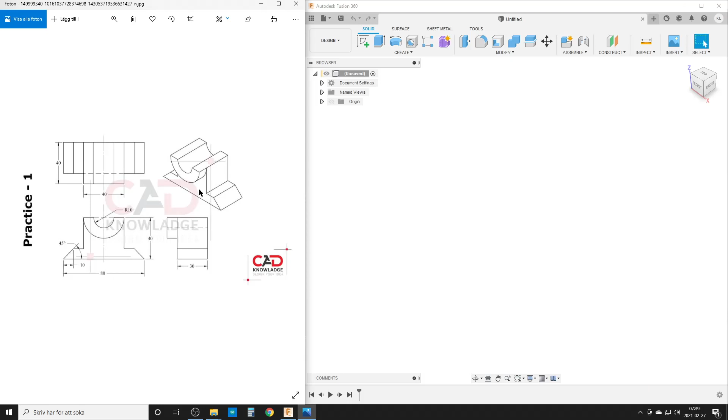But first of all, let's have a look at the drawing. This is a little small exercise, practice number 1, so this should be really easy. Yes, it is easy. Let's zoom in a bit. If we have a look at this, we have some type of dimension here, we have a dimension here. These two are basically extrusion dimensions, so we should be seeing all the dimensions we need here. Yeah, the 40 dimension up here is the same as this here. So from this view, we see everything of the part. So this is what I will sketch.

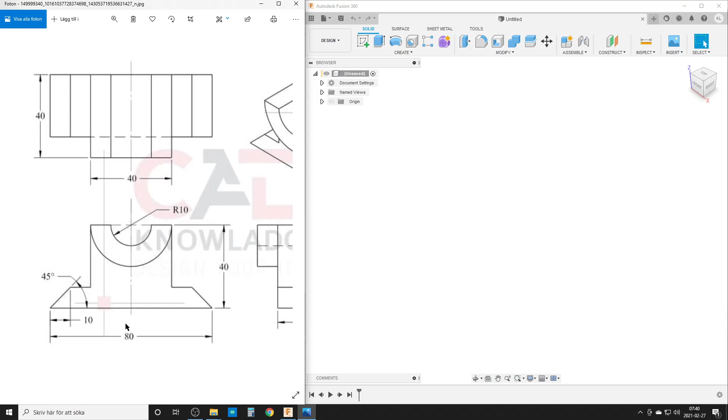I will first show you how I sketched this in the early beginning, where I sketch everything that's in the drawing. And then I'd like to show you a bit of an extreme version of the other way, where I sketch the bare minimum dimensions and then use features to create the part. These are like two ways to create things in Fusion, and sometimes there's a golden midway in the middle. That's the best way to do things. So I just want to share this and hope you enjoy it.

Let's start, create a new component. Part 1. I don't want to call it anything stupid. Part 1. Style. I can't spell. Style. New. Like you're a new beginner, you will most probably sketch everything you see. I did that. That's nothing strange. We're going to create a sketch. I'm going to select the front plane here to work on.

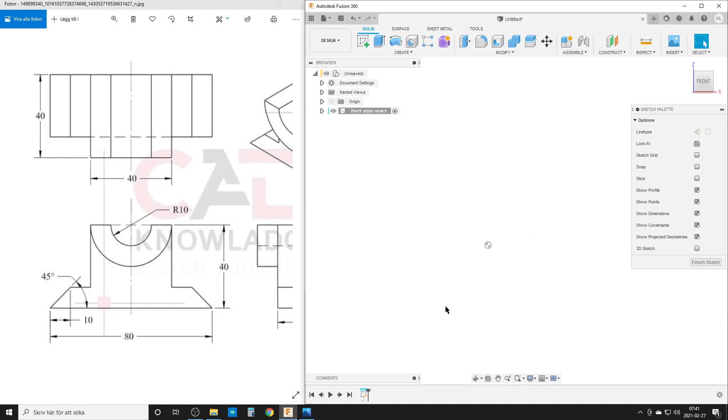The first thing, we have a line here, so let's start a line. I'll make it horizontal, it's going to be 80. We're going to use constraints. Yes, I have shrunk my window here, so I have to hit the constraints down here. I'm using midpoint, this line, and this point, so I get it locked down. Let's open up here and see. By locking it down like that, I get a fully constrained sketch. And now we can start sketching the other stuff here.

We have a line here. It goes like this. It gives me the parallel constraint. I say thank you, and then I go up. I finish that, and then I do the same thing over here. I try to use the help lines to get me somewhere correctly, like that. And we can start dimensioning. I'm gonna hit dimension up here. You can hit D on the keyboard if you want to.

The dimension from here to here is 10. And the dimension between these two should be 45 degrees. We can also put it down here, 45. Let's do a dimension first. This here is supposed to be 40. And the dimension between these two is supposed to be 40. Let's see if things fly away. It didn't fly away. Thank you, Fusion.

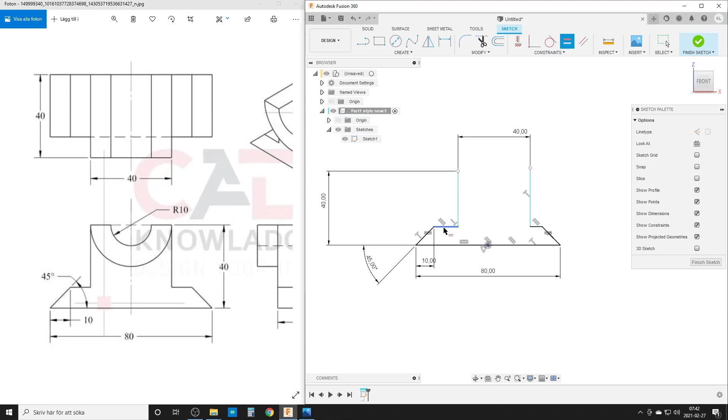I'm gonna hit escape to stop the dimension tool and do some equal constraints. Let's see if it works. This one is equal to that one. This one is equal to that one. And let's see, it's still not fully defined. These two are equal. And by doing that, we have a fully defined sketch with dimensions everywhere. We are just missing the arcs, so hit escape again.

We're going to create an arc. We can do 3-point arcs; that's the easy one sometimes. We're going to do from here to here and just put it somewhere here for now. And dimension that directly. As we can see, it goes horizontal like this. It's tangent to the side here. That means it needs to have a radius of 20, if I'm not too wrong. Yes, I'm thinking correctly today.

And we have two small lines. We have a line from here to here. Finish that. We do a line from here to here. You get the perpendicular constraints. I had hit L on the keyboard to start the line command. Sorry, I forgot to say that.

And we have another arc. We're going to create an arc, still a 3-point arc from here to here, down to here. These are concentric. Hit escape now to stop the arc command. In constraints, we're going to use concentric. These circles are locked down, so if I click these two, they're going to be concentric and nice.

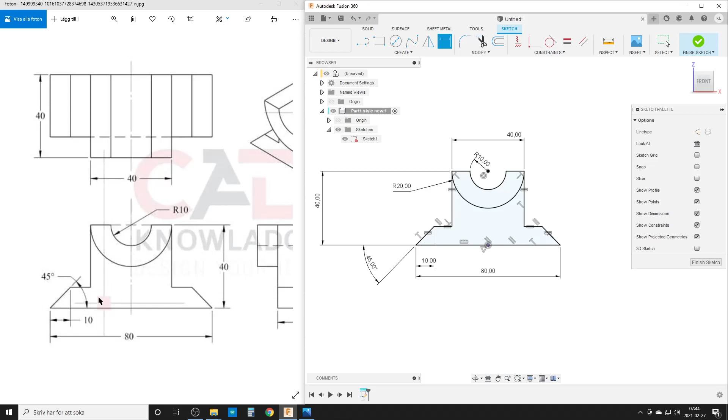So the only thing I need to add now is the dimension of this arc, and we should have a fully defined sketch like that. Because these two are concentric, these lines are the same length. So by doing that, we have sketched everything we can see in this drawing. So we finish sketch, and in solid we're going to do some extrudes. The top part here is extruded. It does it the wrong way now, I wanted this direction, so it'll be -40.

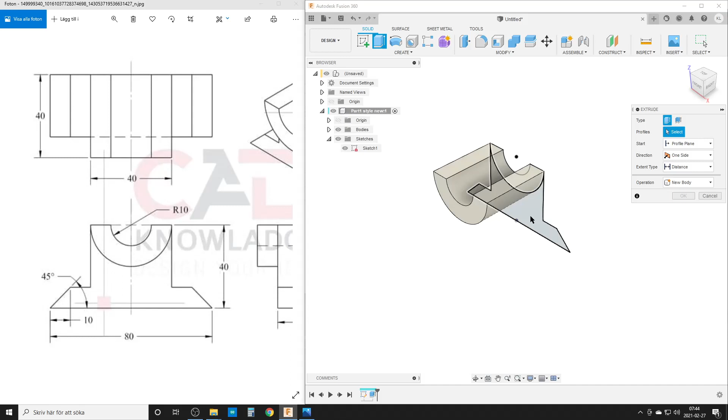And once again, you can see my sketch didn't hide because I've turned off auto hide of sketches after doing features. I don't like that feature. I prefer to turn off the sketches by hand. That's up to you. Adapt things to your workflow. Once again, extrude this part, -30. It was 30, says down here. And now I hide my sketch.

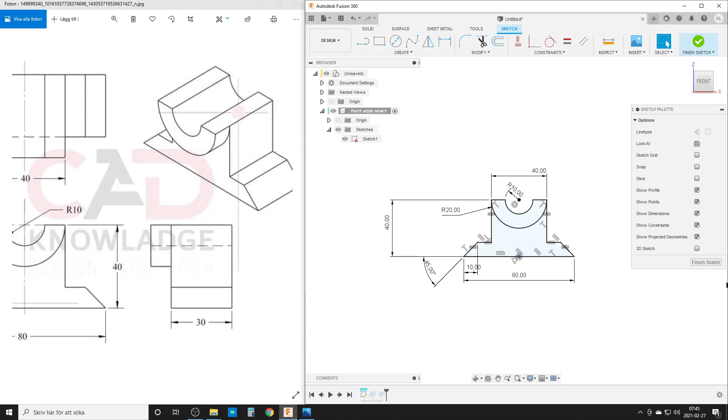So we have created a part. Looks nice. It works. It's perfectly good to go. And you have a very nice sketch to go back and look at with all the dimensions in. But I'd like to take it to the other extreme, where I sketch the bare minimum of this thing. Finish sketch. We're going to create a new component, so we can have a second component. We'll still call it part 1, style stupid, because I'm stupid. We're going to hide this one.

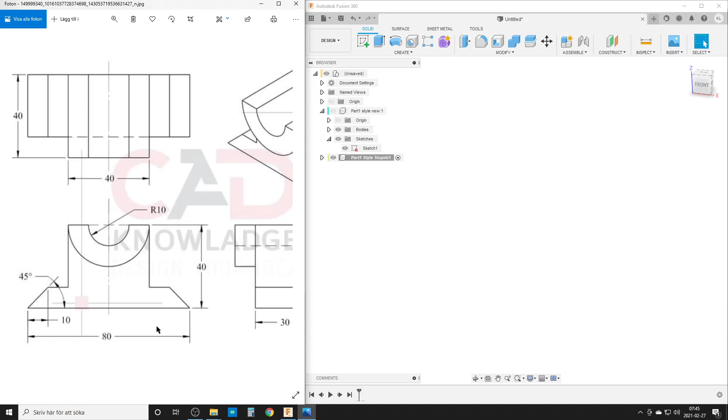And now I want to sketch the bare minimum of this. First of all, looking at this, there's a symmetry. It's a bit stupid to do this, of course; this is so simple you can just sketch it, but I want to explain the thought process when I see more advanced shapes. If I want to do this, I would do half of it. This is symmetric, so I can do just half of it.

These are round corners, which I can create using fillets. This corner here can be created with a chamfer. It says 45 degrees, and it says 10 here. It means that this distance must also be 10, basic geometry. So let's do part 1, style stupid. Stupid 1. Stupid 2 will come later. I will start in the same place.

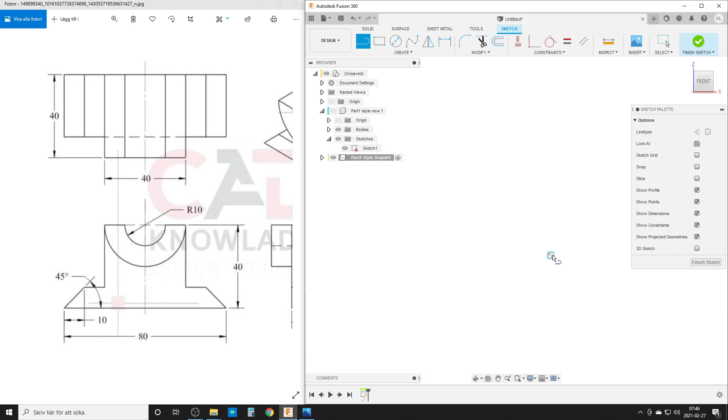I will start a line. And now we could basically draw everything I want. I start in this point down here. It goes here. It goes out. It goes up. It goes in. It goes up. And it goes in. Boom, boom, and boom. Like that. Just draw the basic shape. You see, I have removed all the helping corners and stuff. You have to rethink the model a bit in your brain to do this.

I hit escape. This is going to be horizontal. Let's add some dimensions. Dimension up here. This here is now 80 divided by 2, because we are going to sketch half of it. This here is going to be 10. This dimension here is still going to be 40.

The dimension radius 10 means that this here needs to be 10, and I can use an equal constraint. This is 10 and this should be 10, so make these two equal. And the dimension of this line and this line here, that's 40 divided by 2, because the full length is 40. And we need one more line to create the bottom of this. There's going to be a line straight over here.

Oh sorry, that's the wrong option. Control Z to undo that. I happened to hit the rectangle. I don't want a rectangle, I want a line. Sometimes I hit wrong in the menus. Do a line from here to here.

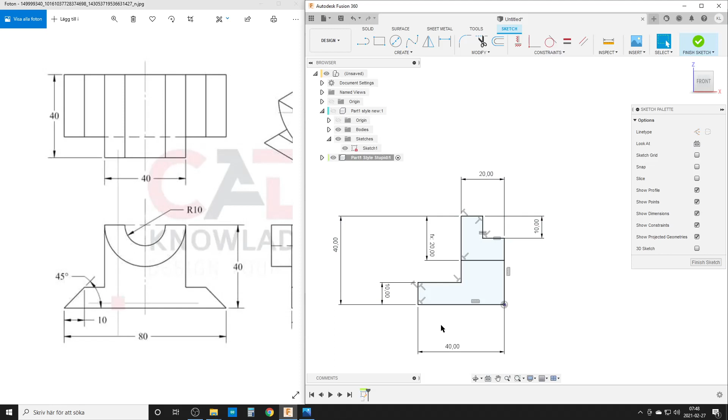We're going to dimension that from this point up to here. Put the dimension out here, and it's going to be the same, so I'm just going to pick up this dimension here, 20 or D16, so if I change anything. And by doing that, I have done the complete sketch. It just looks a bit like a mess, as you can see. So this is something if you sketch like this, call it a scaled-down sketching. It can be confusing if you go back and look at sketches.

But let's do the body now. Finish. We're going to extrude. Once again, this one we shall extrude -40. And extrude the second one down here, -30. Like that, and we're going to hide the sketch. Sorry, I forgot to open up to show the nice sketches. Yes, the sketch is fully defined, so we're going to hide that one. And now we're going to use the tools.

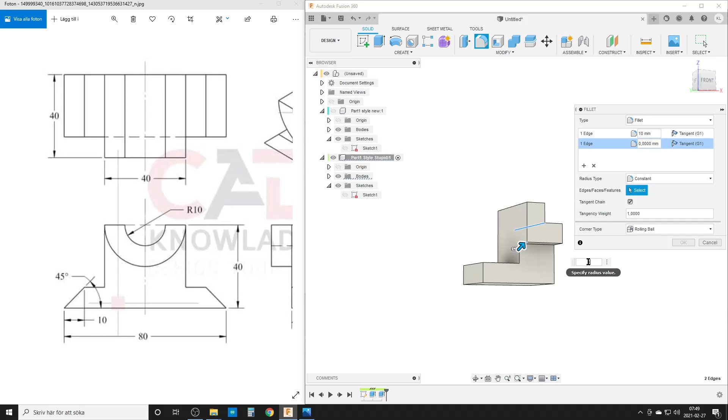We're going to do a fillet. Let's start with this inside here, and that is 10. Because the next fillet is not the same size, I'm going to add this one here. And that is 40 divided by 2, because that's the radius, 40 divided by 2. By doing that, we're done with the rounded corners, and we have a chamfer left.

Sorry about that, my coffee is making me upset.

Like that. And that's a 10mm chamfer, select 10.

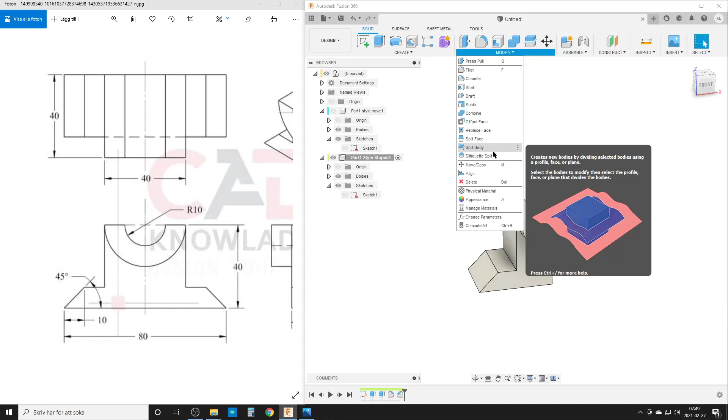And the last thing we're going to do, we're going to use, scratch my leg, sorry. Where are you? Mirror, mirror, mirror. I forget what the commands are. I don't use the menus that much. I prefer using the search function. I'm blind today. Let's do it like I like to do it. Hit S on the keyboard, type in mirror, and you find the mirror command. And we use the first one, that's for solid mirrors.

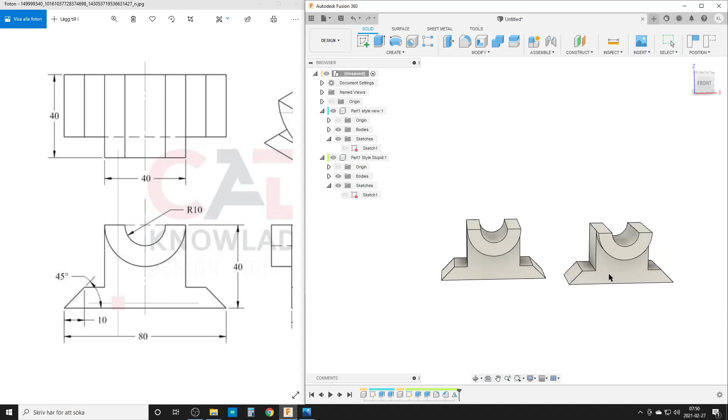We're going to select body, and we're going to do this body here, and the mirror plane is going to be this here. And we hit OK. And by doing that, we have created the same part. I'm going to turn off the first part. Oh, sorry. I'm going to take this component now and just move it to the side and turn on the other one. And as we can see, we have the same part, but we have created them with two very different sketches, but we end up with the same result.

This is just to show you there are different ways to do things, not only how to do the sketches, but you can do a lot of things in features. So I hope this can be useful for some of you, thinking about things in a bit of a different way. Don't always get tangled or too focused on the drawing, like, oh, I need to draw every part over here. A lot of things can be done using features like fillets, chamfers, circular patterns on features, not circular patterns in sketches, and so forth. Hope it's useful to you.